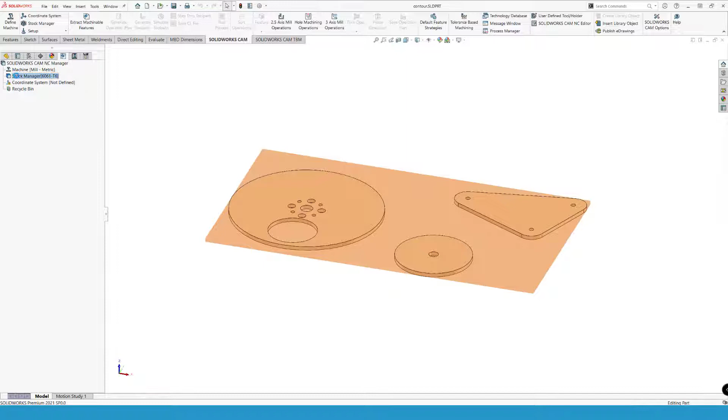First and foremost is to make sure that we have a stock that covers everything. Otherwise, we are not going to be able to cut the perimeter in the first place. I'm going to extend just slightly 10 millimeters in X and Y using uniform transformation, so we have everything encompassed in the stock material.

At this point, obviously, you'll go and set your machine and your tool crib and your post processor and so on, but let's just skip that to keep the video short. I'll create a new mill part setup. I do not want facing, but I want to machine in this direction.

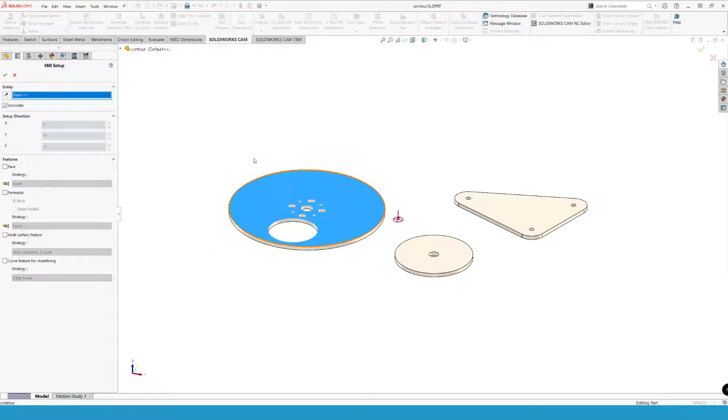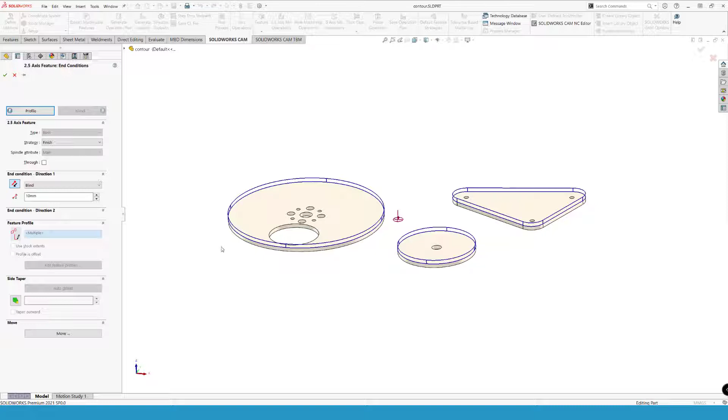So first off is the perimeter. I want to insert a 2.5 axis feature, and this is going to be a boss. And since all of these are exactly the same height, then I can do it like this. For end condition, I can go up to stock, change the direction, obviously.

Or if I want to have an offset, not sure if we want that, but we can have offset from face and then pick the bottom of the part file and we get a nice offset. And how much offset you need is up to you. Let's put in 1 millimeter.

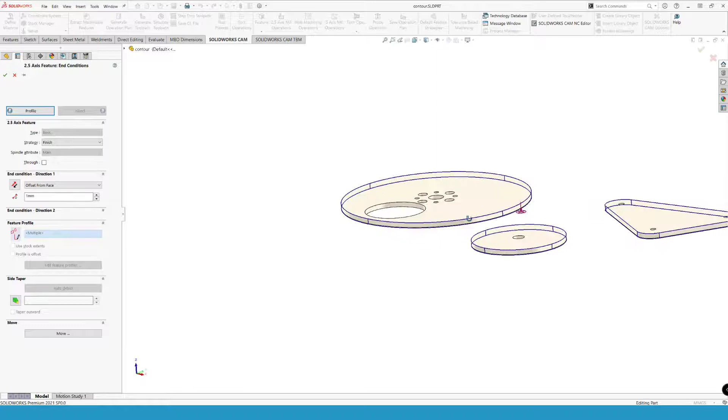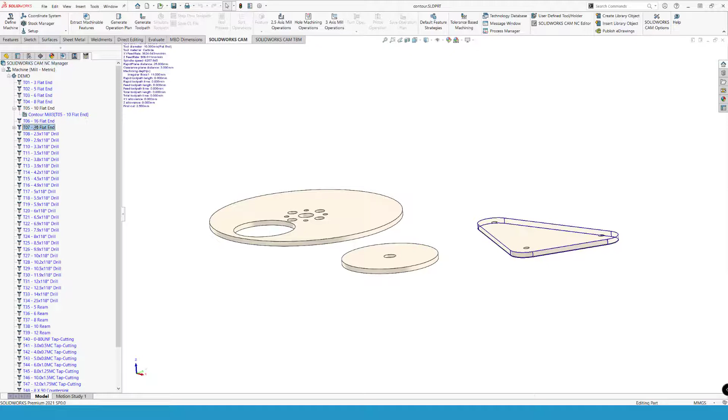Now I want to machine these ones, so let's just generate an operation plan for them, and we are using a 10 millimeter flat end. For this one I actually want to use 20 millimeter as well, so I'm just going to drag this tool down, so we are using 20 millimeters on all of them.

And I can actually combine them if I want to, so let's actually combine them. Combine operations, yes. So now we have one. And for this one, I want to do like in the forum thread, so doing a spiral milling, but this is going to be a rough cut, otherwise I will leave a witness mark.

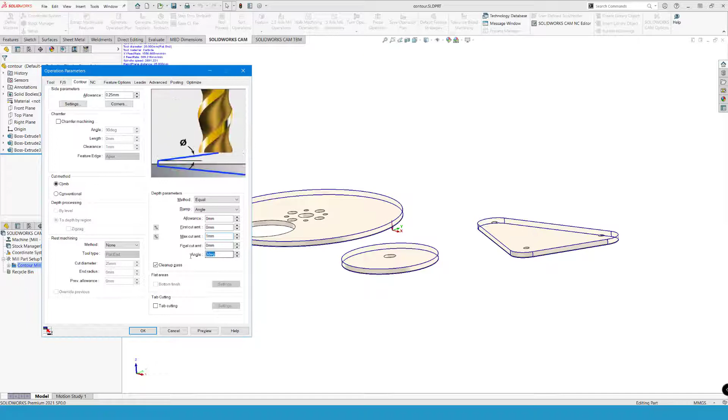So I will just put in a value of 1/4 millimeter, and I want to go angle. Let's go nothing on the first cut amount, max cut amount of 1 and 1 degree, and preview that. So now we are coming in with a lead in and we are machining down. And at some point we are going to lead out as well.

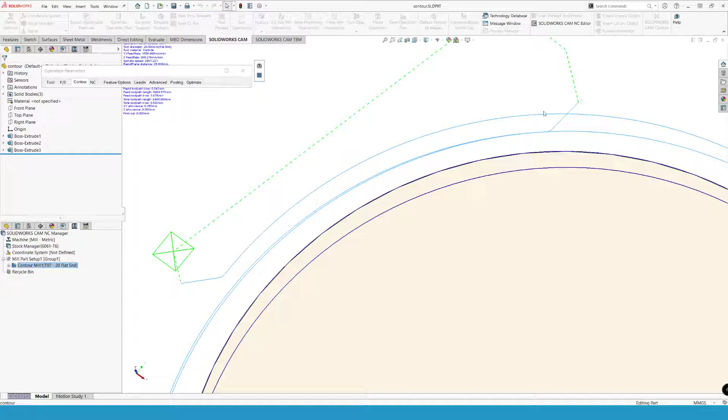And this is not going to work, because if I have a material that is really thick, then I cannot just sidestep into that wall. So in my lead in, I'm going to set that to none and preview, and that should actually take it away. Why didn't, okay, yeah, my bad.

And this is one of the things that you need to understand in the CAM system, that we now have 3 different contours, and I have different features to work against here. So one of these I set to none. That was this one. So this one has no lead-ins and lead-outs. The other ones still have, so you can set those individually.

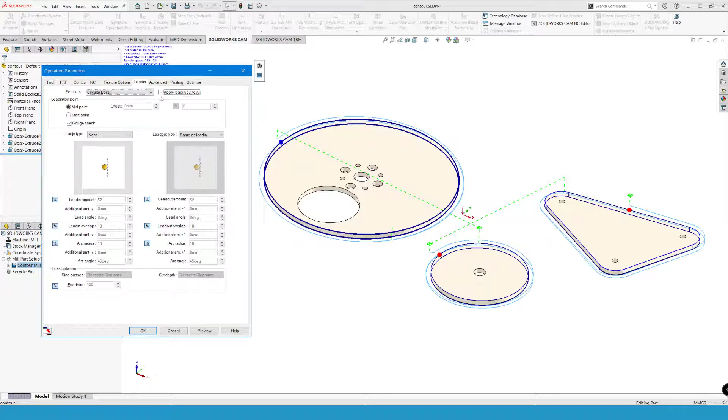But if you press the apply lead in out to all, then we should get a fine result. So now we are coming in and we are coming out without sidestepping into the material. That was the first part of it. Let's go and do one more.

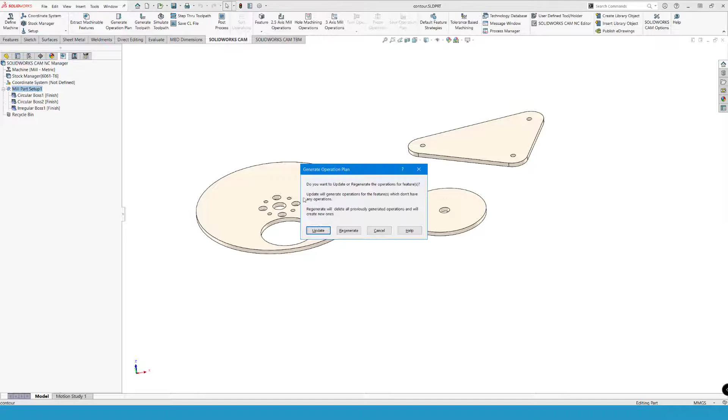So basically, let's just copy this one actually. So copying a feature or an operation would be holding down Control key and dragging the feature up 1 step and then down underneath where you want to have it.

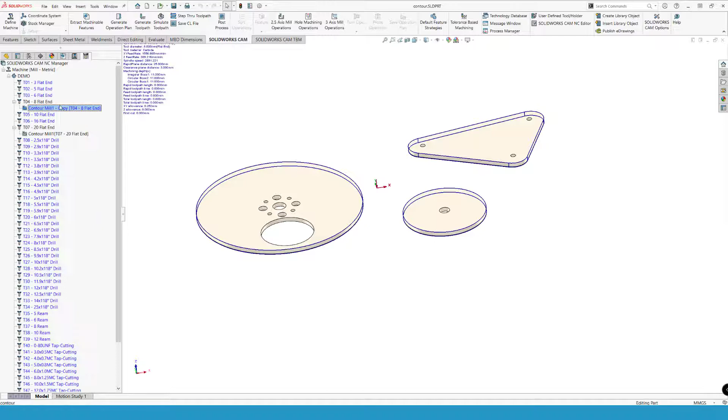Contour mill copy, that is not going to run with a 20mm. I want to go for a smaller end mill, for instance 8mm. And I want to change the side allowance to 0, obviously. And I can preview that, and that is going to work.

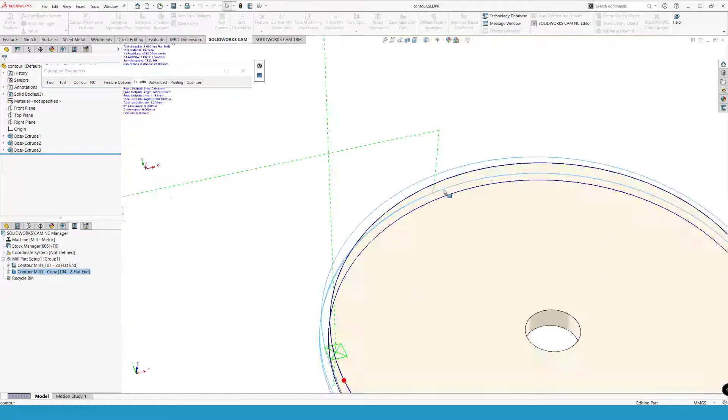And now when I change that, I actually have room for having a lead in. So now I can do an arc lead in for everything. And then it's up to you to calculate how large a lead out you can have, because now you can lead out and leave no witness on the side of this cylinder. But that's the first part of it.

So next up is these holes. Basically in the SOLIDWORKS CAM manager, if you go to options, there is a tab called mill features. You have different feature types to recognize, and one of them is holes. And for holes, we have a recognition option that if anything is larger than, then it's going to be picked up as a non-hole, meaning a milling operation or contour.

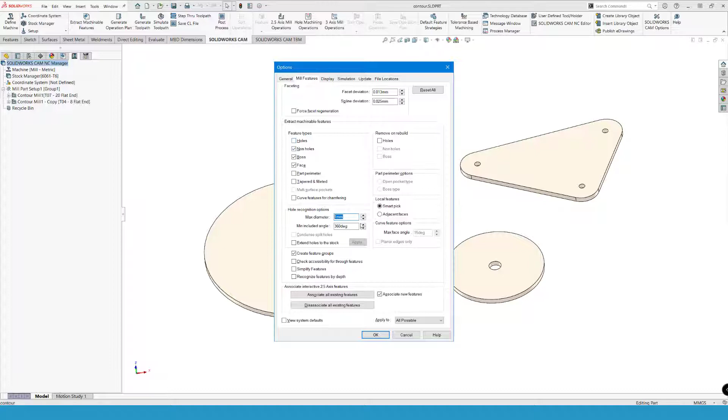So in my best guess, I would say put this value low, do not recognize holes. And then you can go in and do a recognize features. And it found a face feature. We don't care about that. We did find a circular pocket, this guy. We found a circular pocket here. We found a circular pocket here.

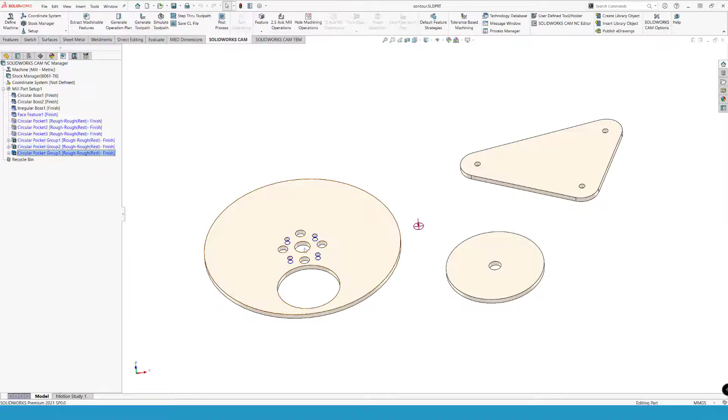And then we found 3 groups. These 3 are same size. These 4 are same size. And these 4 are same size. If I investigate this one, this is a 10mm hole, and this one is a 12. So I would say I can cut everything with an 8mm end mill, because that is 10mm, so that should be fine.

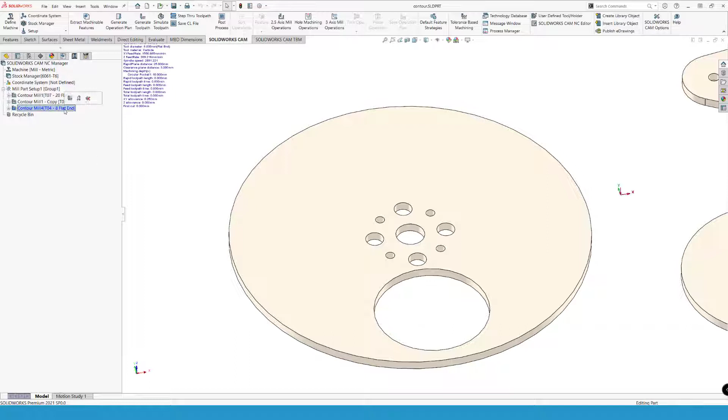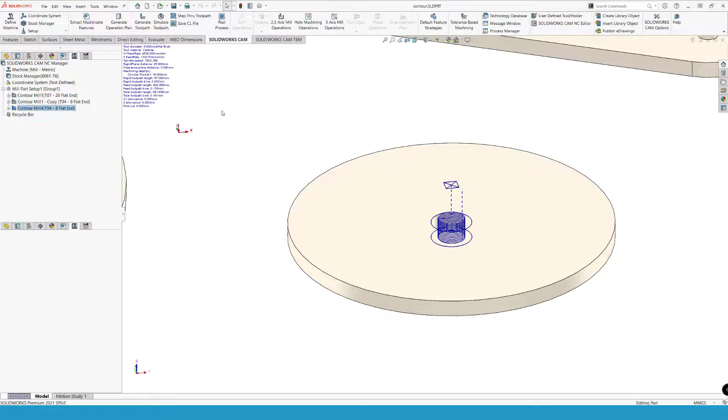Not sure why I didn't pick up the default, but I can obviously go in and put the lead in and say I want to have arc. If I want to go even further, I can say I want to enter and retract at the center as well. So now I will plunge in and start moving out. That is entirely up to you.

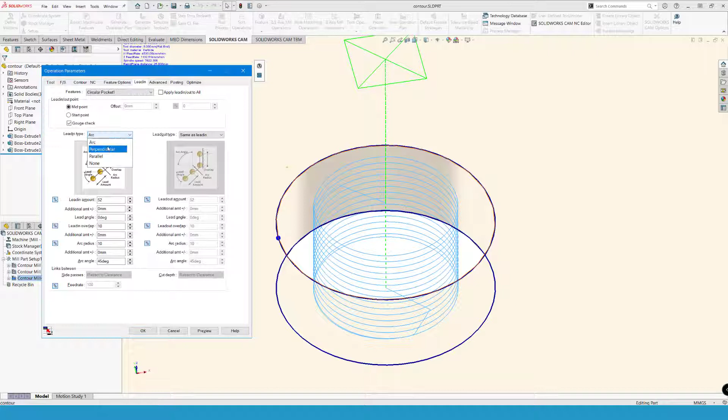For this case, maybe you actually want to have none, and you might even not like to have an enter in the center of the hole. So this is probably what you're looking for. Okay, so that one is quite good. I have contour mill 4, which is working perfect for holes, right?

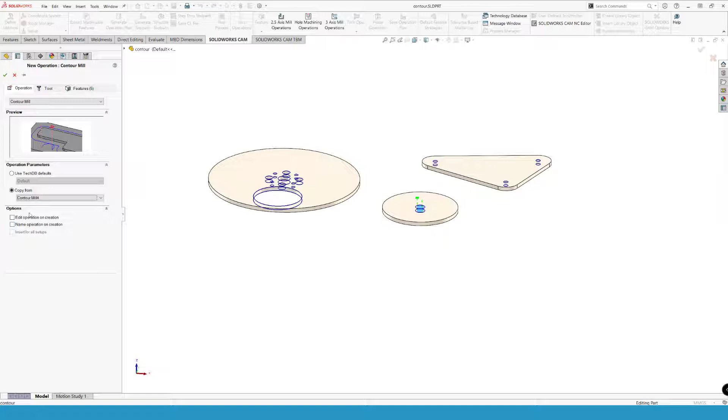So now I'm just going to mark all of these ones, create a contour mill. I can pick the 8mm again, and I can go to operation, and I can copy from, instead of using TechDB. So now I can copy from contour mill 4. If I wanted to, I can edit the operation on creation. That would open up the dialog, and I can even give it a name when I hit OK. But in this case, I don't want to. So just hitting OK.

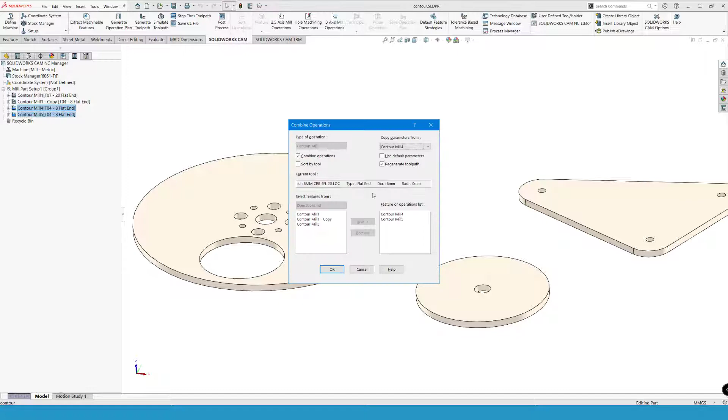Generating toolpath, and we have everything in one contour milling operation. So that is one very easy way of doing this. And now obviously I can combine these two as well, giving me a rough cut, a finish cut, and then the cut of all of these holes.

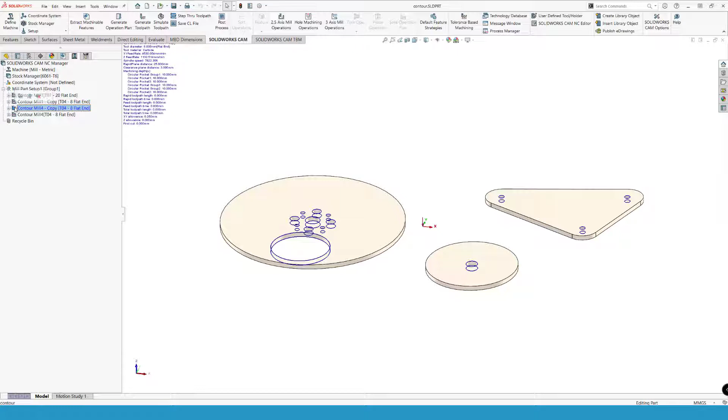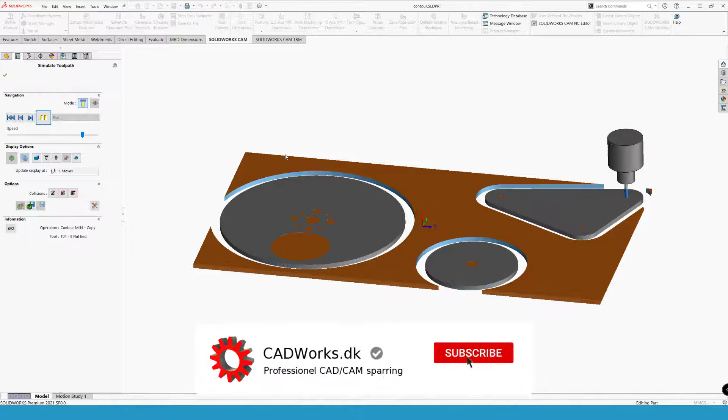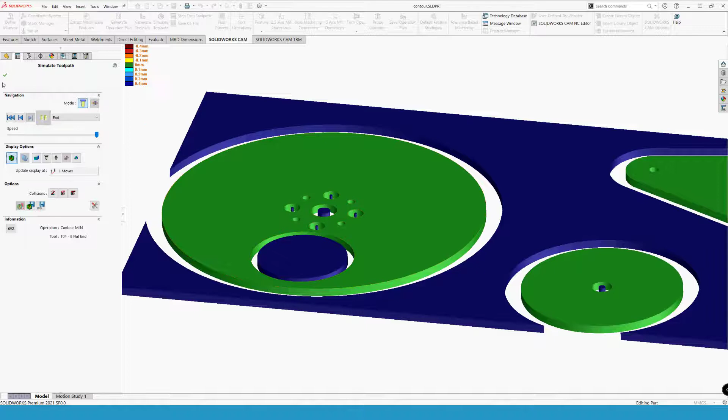And simulating the toolpath is going to look something like this. Let's just crank up the speed. And we should be good. So now I can do a compare and I can see that everything is in green, and that is exactly what we are looking for. So I hope this is going to kind of teach you how you can use the software.